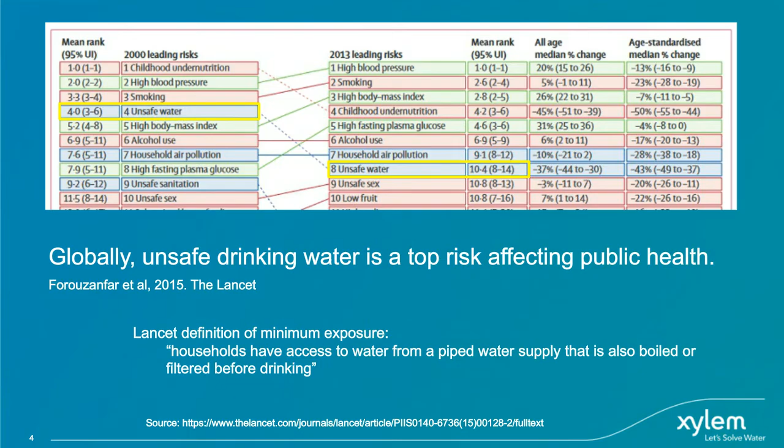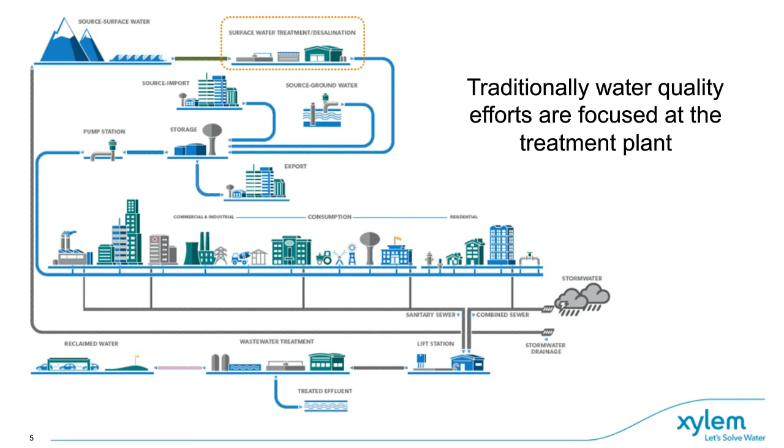So traditionally, water quality efforts are focused at the treatment plant. This is where we have the most control over it. If we're going to relate this to secret agents and spy movies, this is headquarters. Henry Darcy was another one of those first agents of water quality or public health, and he started looking at sand filtration before going into a distribution network to deliver safer, clean water to the residents in France. And that was around the time that people started realizing it's not just the stuff we can see, it's also stuff we can't see. It's things like heavy metals, bacteria and viruses, and things we're finding more about every day, like endocrine disruptors, personal care products, all those sorts of things.

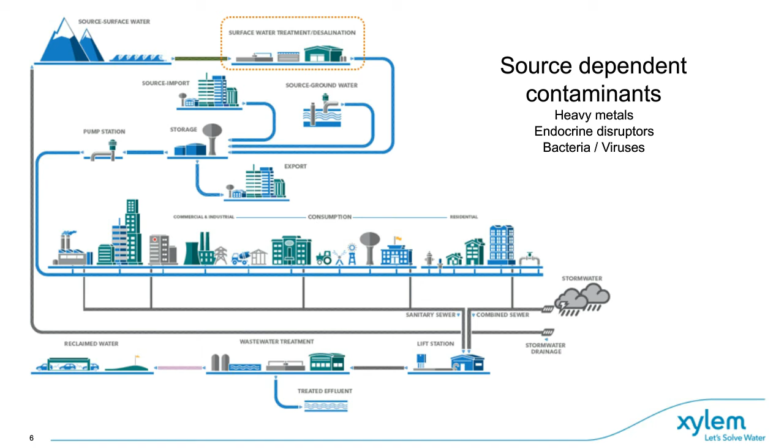But what I want to focus on here is that when we're at the treatment plant, we are only focused on treating what's in the source water. But we know that water quality can degrade in the distribution system. Distribution systems are huge assets. A lot of times if you look at municipal budgets or the amount of liabilities they have, the infrastructure, especially in the distribution system, is a really big component of that. But it doesn't necessarily get all the attention that the things that people can see do.

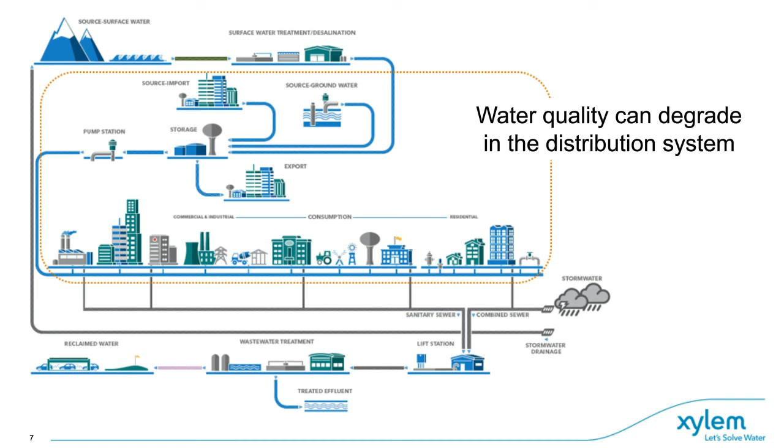And so when we're talking about the distribution-dependent contaminants, we're talking about things like bacteria and viruses. And those are things that are impacted by how much chlorine residual or disinfectant residual is left in the distribution system. But as we know, chlorine residual decays over time, and that is a function of what we call water age. And then there's also the impact of leaks and siphons.

So I was talking to another utility recently where the general manager was saying it's important to him that they really keep their non-revenue water at a minimum, because if they have leaks and they have these siphons, that's an issue for water quality as well. So he was making that connection. It's a rural utility that he runs, and he was saying that if there's a siphon, there's a good chance that pipe's running through a cow field. And so some of that cow patty is going to end up in the distribution system, which is obviously a health concern.

Currently, the mode that we monitor our distribution systems is regulated by grab samples. That's the primary way we go out and we collect samples in the distribution system to ensure that we've got high quality water. And so depending on the size system, there's a lot of variance, but monthly grab samples is pretty common. And a lot of this goes down to the total coliform rule.

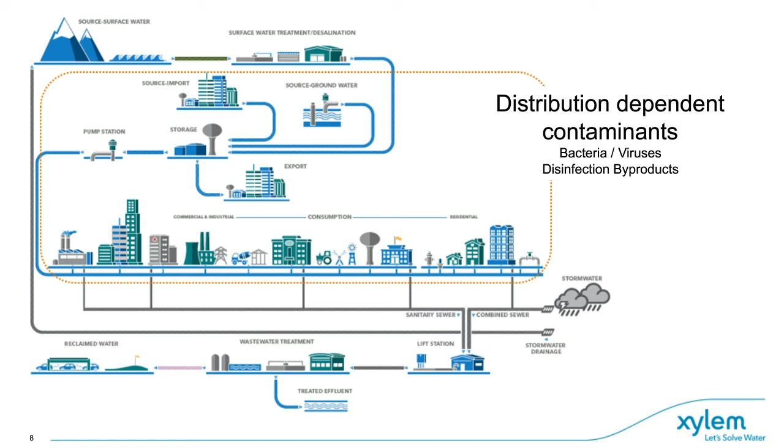But there's another concern we have when we're talking about water quality in the distribution system, and that's the concern over malicious attacks. Although it's really not a high likelihood, if there was an attack on a water system, it could really be catastrophic.

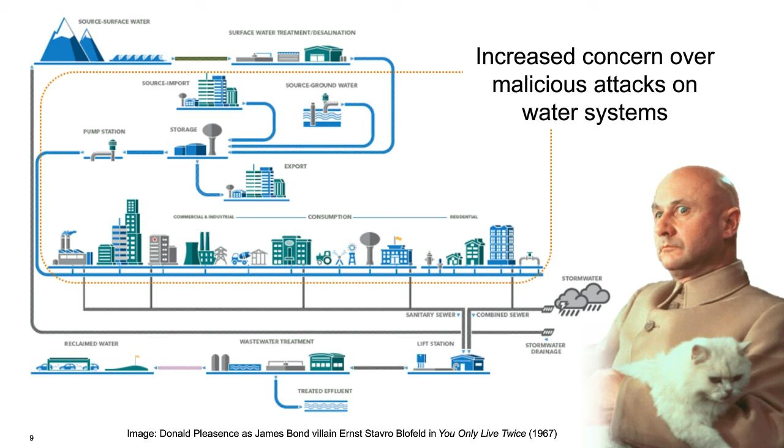So I would like to take a pause right now before we get really into the meat of this presentation and ask you all to fill out a quick survey. And so this goes, how familiar are you with the EPA Surveillance and Response Systems Framework? And I'll give you all a few seconds to answer that.

All right, so not sure if everyone got a chance to respond, but it looks like we've got a pretty even response between not at all familiar and somewhat familiar. So it sounds like we're going to have a good discussion today.

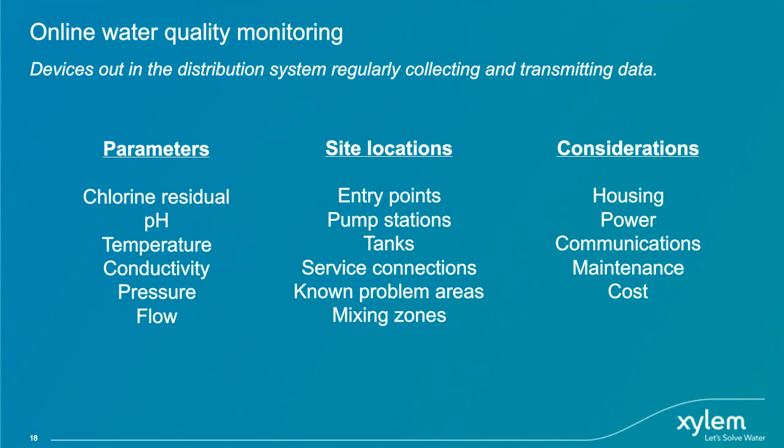Some of the most popular communication means are SCADA, cellular is becoming bigger, but AMI or advanced metering infrastructure, if you've got the right system, can be a really good asset as well. And so then, depending on what communication backhaul you choose, where that data lives and how you can access that data matters as well. So I'm going to go into a little bit more information on that by going through a couple examples. So the first type of parameter we might want to look at, as mentioned, was chlorine residual.

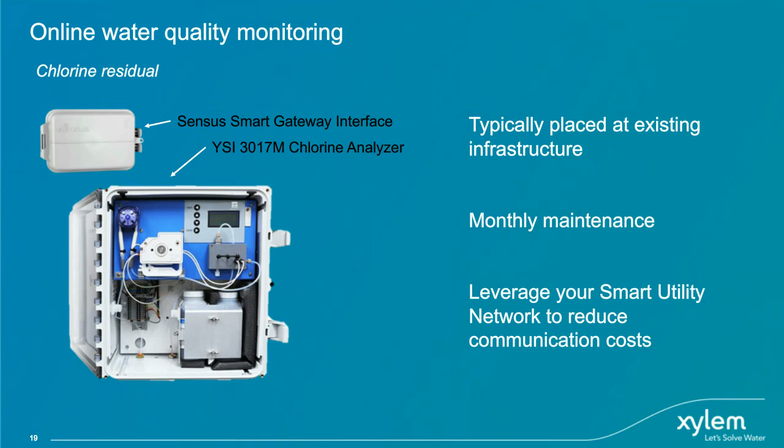What that looks like on the data monitoring side is all this data is coming back to the AMI head-end system. And this can be really helpful because now we don't just have monthly grab samples. We now have 5-minute data, or we could tune this to different intervals as well. And so this can be really helpful in calibrating and understanding our system. Maybe we're putting more chlorine in the system than we really need to be.

But the other really important component to consider when thinking about online water quality monitors is the algorithm, or what triggers going on to the next step. So what triggers that this is out of bounds? And so we need alarms. We need something to tell us, hey, we've got a problem, we need to investigate further. And what we can do is we can set threshold alarms that will automatically send a text message or an email to somebody saying, hey, there's an issue.

This doesn't necessarily have to be the way it's set up. You may have only one of these in your system and you say, hey, we don't need alarms because we're just going to put this up in the operating room and somebody's going to be looking at it all the time. That's a fine strategy as well. It's just something to consider as you look to include 5, 10, 15 of these in your system.

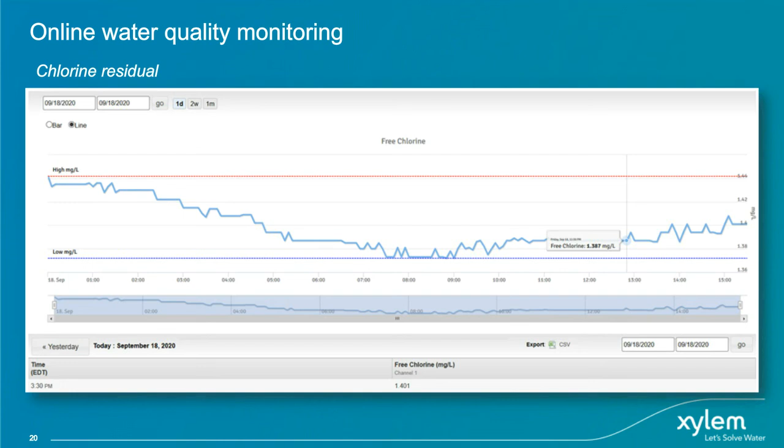And like I said, pressure and temperature are not always thought of as water quality parameters. But I wanted to bring this up because it's a really good case in which this utility, which happens to be Walla Walla, Washington, leveraged AMI to truly create a smart utility network.

To compare this, if you were going to try to do this using a different communication backhaul, such as cellular, you'd really want to account for all those costs. And so I bring this up because you really want to compare and contrast the pressure and temperature type monitoring with chlorine analyzers or some of the other parameters. And you really have to consider these holistically.

The way I kind of like to explain this is it's a bit like an analogy. It's not an either or. It could be a both, or it could just be one. If you think about the game chess, the chlorine analyzer would be very reflective of like a bishop or a rook, whereas a water meter with integrated pressure and temperature, those would be more like pawns. So you could afford a lot more of them.

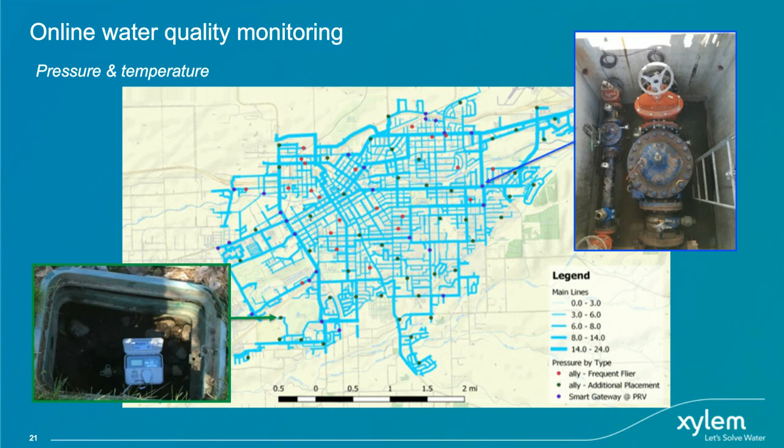Moving on to the enhanced security section. The whole idea behind enhanced security is to protect those remote assets from attack as well as vandalism. And so I almost like to think of this as the teenage protection. And the EPA recommends there's a couple steps in this, and the first is hardening. What they mean is you have to make it hard for somebody to get into those remote assets. This could be fences or locks, barbed wire, bollards, whatever just makes it difficult.

They don't have it here, but one of the things I've seen some utilities do is that they hide in plain sight. So this really reminds me of secret agent stuff where they make the pump station look like any other house. The next component is the intrusion detection. And so this could manifest itself in a lot of different ways. It's going to depend on the criticality of that asset. This could include CCTV, motion sensors, door alarms.

And so that's just something that you're, again, going to have to weigh the cost benefit of: do I really need the highest level security here, or can I get away with something cheaper, and what makes the most sense? And then the sites they recommend are obviously things that intruders could get into, so like pump stations or tanks. But these could also be like PRV vaults.

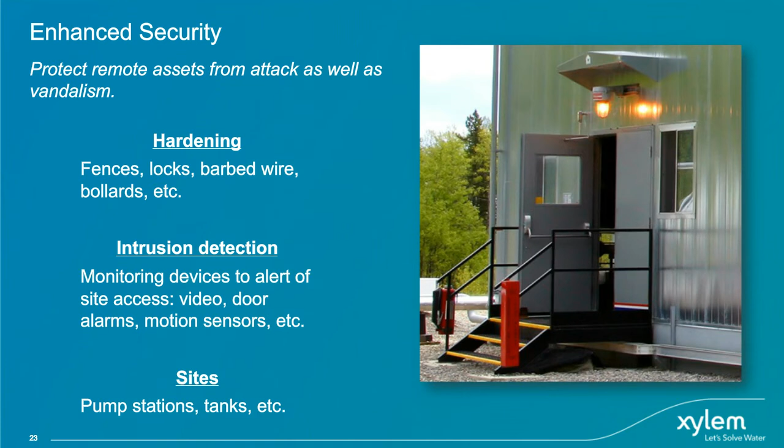So looking at one example of that is utilizing door switches. That can be a really cost-effective way to monitor the comings and goings of anyone into a particular building. The way this works is you've got a magnetic reed switch, and this is exactly like really what you might have in your home security system with the windows. You've got two magnets, and when that magnet trips, when the window's open, it triggers an alarm. In this case, we can hook that digital reed switch to a smart gateway interface and get that data back over the customer's AMI system.

The benefit of doing it this way is that it's near real time. You don't even have to necessarily wait for the next polling because the magnetic reed switch is continuously being polled. And you can get these text and email alerts. So within just a minute of somebody opening a door that you want to know about, you could get a text message saying, hey, there's something going on there. And of course, like I mentioned, it's very cost effective.

Moving on to meter tampering and backflow alarms. The idea behind this is that there's a lot of data coming from these meters that, one, tell us about the meter health, but they can also inform on system problems. And a couple that the EPA has really honed in on are tampering alarms.

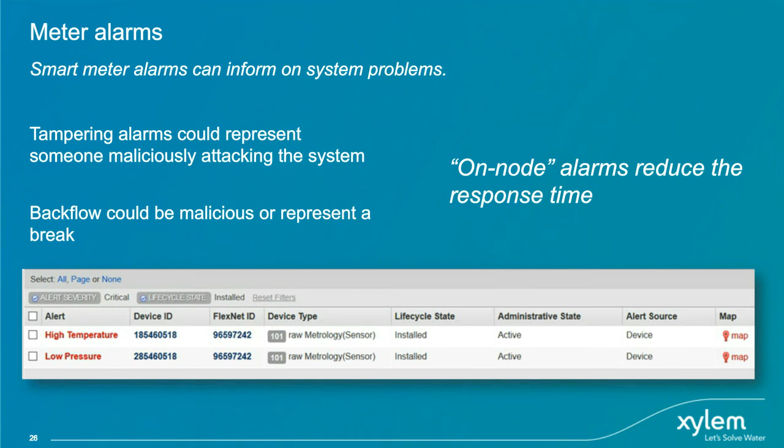Going on to customer complaints. Customer complaints are really important because they represent another source of water quality information. And I'm sure a lot of utilities on this call are already utilizing customer complaints to solve water quality issues. But the EPA goes into a good bit of detail about the best way to deal with this, and they give some guidance here.

And the main construct is, first we want to funnel all of the customer complaints, or really customer interactions, because these could be coming not just from phone calls, but also from emails or tweets or whatever the latest platform is. And the important part there is to get them all into one centralized place, where customer service can take that information and put it into work orders or have a plan to do something with them.

The next step is filter. This is really sorting the quality concerns that come from customer service into either a bill issue or something that actually ties into water quality, whether that's a low pressure issue or a taste and odor issue. And then focus. Focus is where you're looking not only at that customer information, maybe the spatial and temporal distribution of these customer complaints, but also at other data sources. And this is where having some of the online visibility I've been speaking to, like AMI and pressure, can help quickly sort out a lot of those issues that are not water quality related.

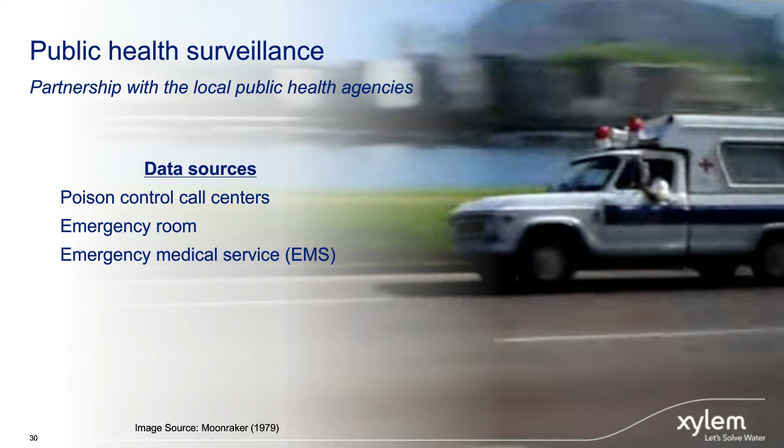We're going to do another poll here. Now that I've been through the components of the surveillance system, do you have any of these already? So feel free to select all that apply, and I'll give you all a few seconds to answer. All right. Oh, I'm going to guess that a lot of you have more than that, but that's okay.

So let's move on to a quick activity. I really want you to imagine that you get a call that the water tower has been poisoned with arsenic. What do you do? And I really want you to think deeply. Do you have a plan for that?

So the reason I bring this up is because in the spy movies, the protagonists, they never have plans. They just kind of shoot from the hip, and they always seem to make it out alive and save the day. But this isn't the movies, and we do need plans. I really relate this a lot to if you've ever taken a CPR class, you know, if you're the one that's kind of controlling the situation, the instructors say, you don't just say, somebody call 911.

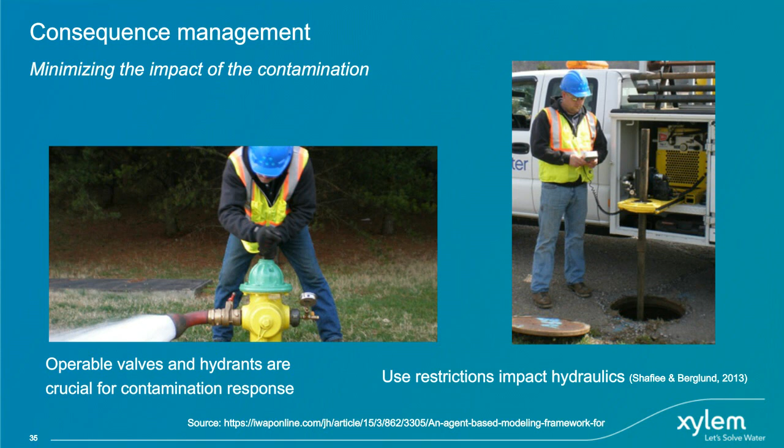So let's do one more poll. What components do you feel like you're ready to adopt? Again, select all that apply. Apparently I clicked a little too fast through the last one, so I'll give you a few more seconds on this one.

Here we go. Let's see. Excellent. That's exactly what I was hoping to see. The response plan is the number one thing you're wanting to adopt. I really feel like that is the most important. As we all know, data for data's sake is pretty meaningless if you don't have a plan.

So to summarize, we've looked at the surveillance and the response side. There's monitoring a lot of different data parameters, automating where we can to decide whether or not there is a problem, and then having a plan afterwards.

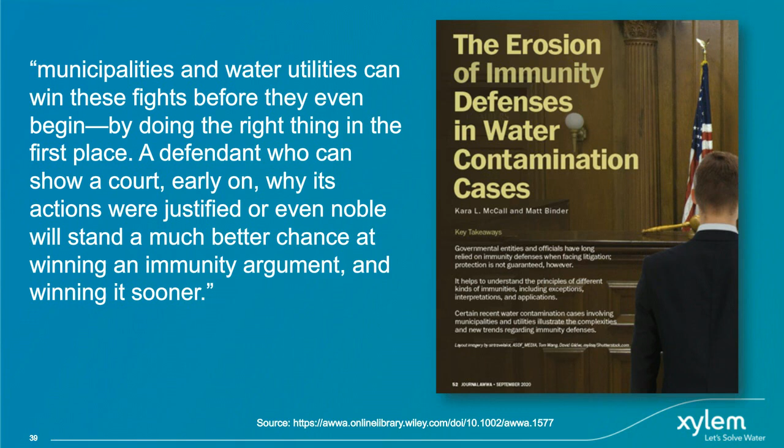So in conclusion, implementing a surveillance and response system can really bring us the peace of mind knowing that if there is a problem, we will be ready. If there are three takeaways I hope you take away: have a response plan to contamination events, implement the most accessible surveillance first, and being proactive protects human health, improves operation, and can limit risk. If we do these things, we can be ready for whatever is thrown at us, and we can be calm, cool, and collected, just like the spies in the movies.